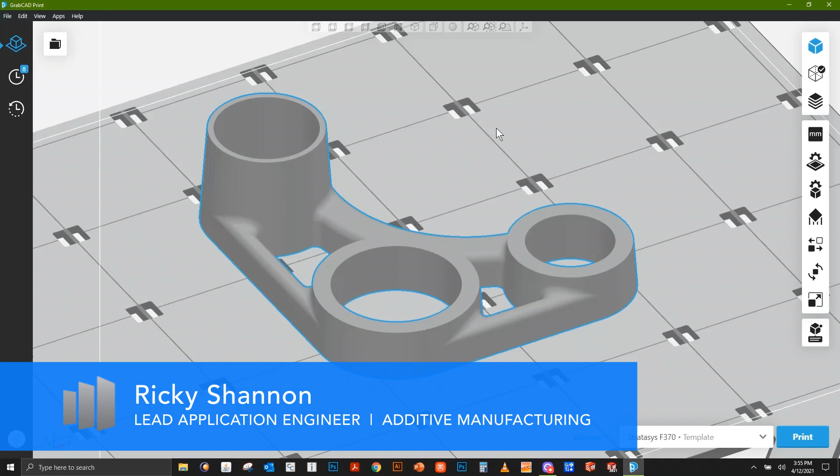My name is Ricky Shannon, application engineer with Trimech, and today I wanted to show you how to use the manufacturing notes in GrabCAD Print. There's two different ways I can think of using this. The first way is simply making notes that you may use in the case of production.

For instance, if we wanted to change the size of this hole and put a threaded insert in it, going over to our model settings and into face, we can click on a cylindrical face and hit apply insert. We'll go to a metric insert here. We'll just put an M8 insert into it and hit update.

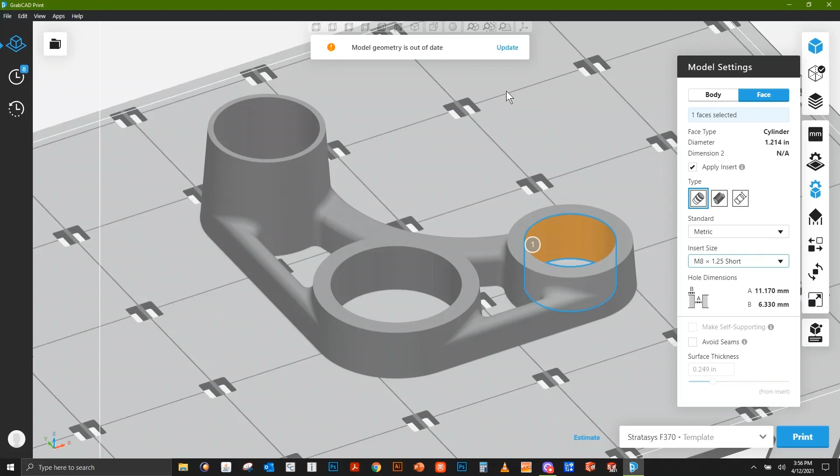We notice when you do this, we end up with this number inside of a circle floating over top of the feature that we just changed. If we click on it, I can see that there's a note here. It says heat set insert M8 by 1.25 millimeter.

And then I can edit this note if I wanted. So I could maybe get rid of the short portion. Maybe it's a custom one, or we could even say there's a specific part number that internally we have for that, or maybe a parts bin in which somebody could go find that particular insert. And we can hit save, and it will retain that information when we click on the note.

Another thing we could do is simply add a note at any time. So maybe for this particular hole here, we want to do a call out for something where we're not going to make a change within the model, but we want to make sure there's a note for it in some sort of post-processing phase.

In this case, we can hit add a note to faces, and then simply type in a note. So maybe we're going to tap this with a 24 by 1.5 millimeter left-hand tap. We type in the note we want and hit save. And if we click on that again, we can see that we have a note. We could even delete that or go back and edit again if we wish.

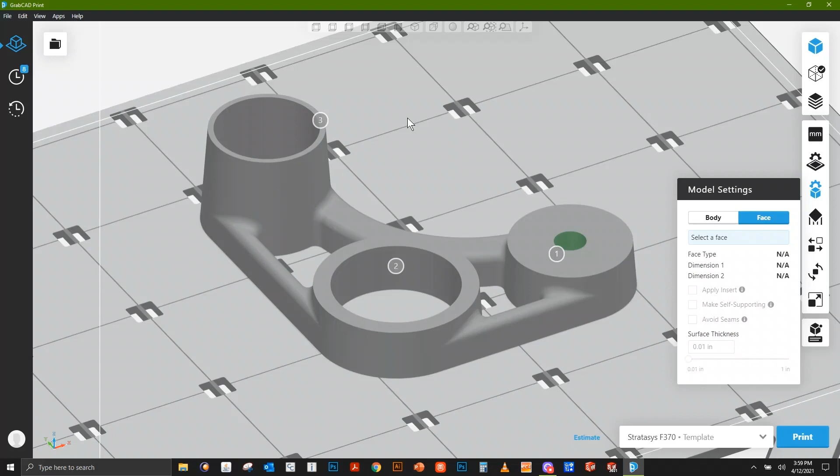Or maybe you want this part all solid, but there's an area where you feel you don't need strength, and maybe you can make it sparse. You could click on a region of the part and add a note: print this area sparse to save weight. So we can make notes on our part, and it's purely a communication-based tool, even if you are not going to be the one setting up the job and printing it.

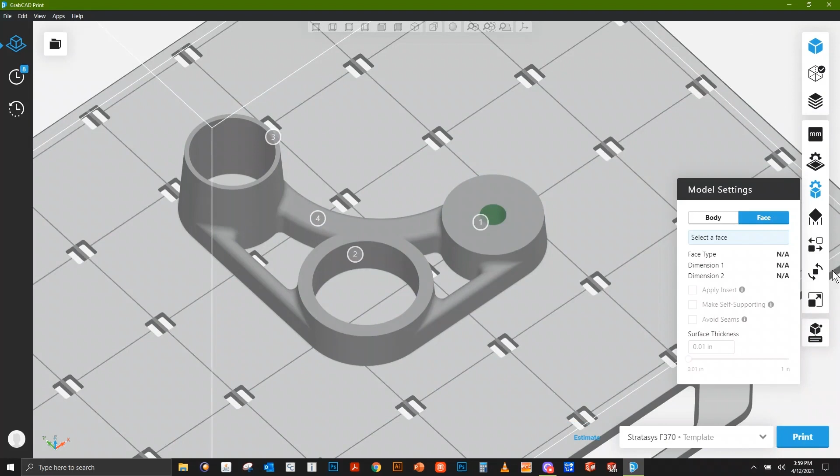The other unique thing is that these are tied to the part, not to the orientation of the part. So if I were to change the orientation of this part, we won't lose our notes. As we close out our orientation command, we still have them here.

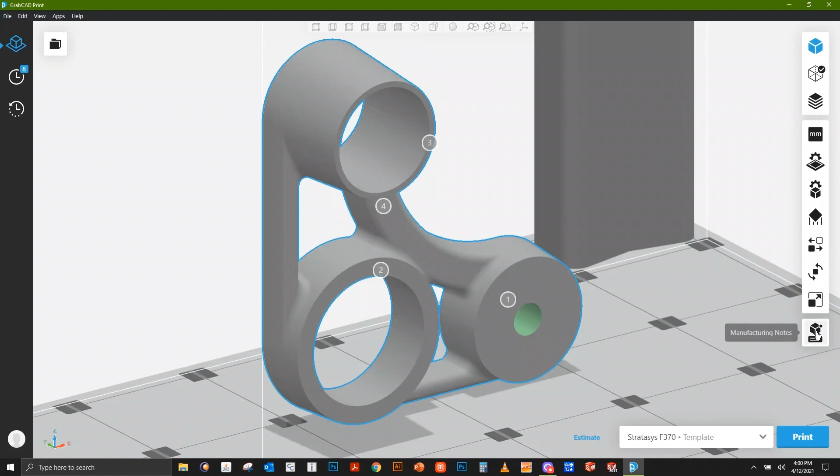What we can also do once we have these is print them. At the intro I told you we'd be able to print on paper, and that's exactly what we can do. At the bottom, we'll see this manufacturing notes icon. When we click on this, we'll see all of our notes. We can hover over them, and it'll call them out by highlighting them. We have the ability to export the notes, and when we click this, it'll set them up to export as a PDF.

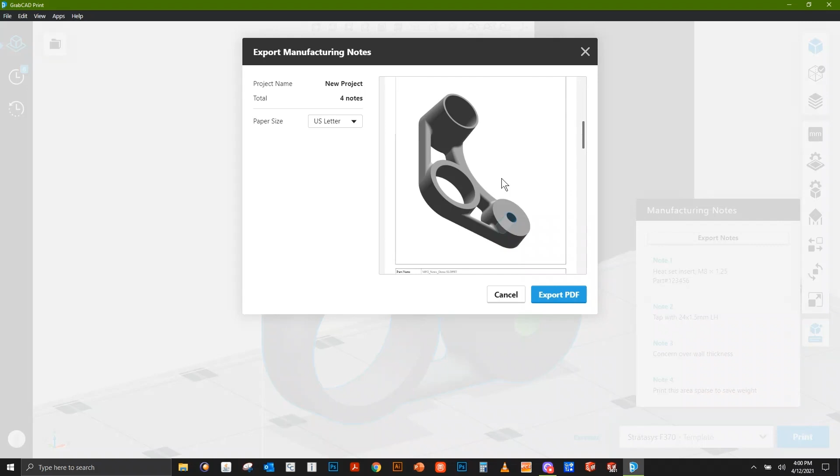As we look through this file, we see a full setup of the entire part. Then it calls out each individual note on its own page, highlighting where that note is and saying what that note says. So we're able to export this. We could print that, like I was alluding to in the intro, or attach it in an email and send it to somebody, or review this information during a meeting and figure out how best to design your parts.

Hopefully you'll find this useful. It's a very powerful tool that's kind of hidden in here, one of the lesser known tools in GrabCAD Print, but I think it's really a knockout tool.